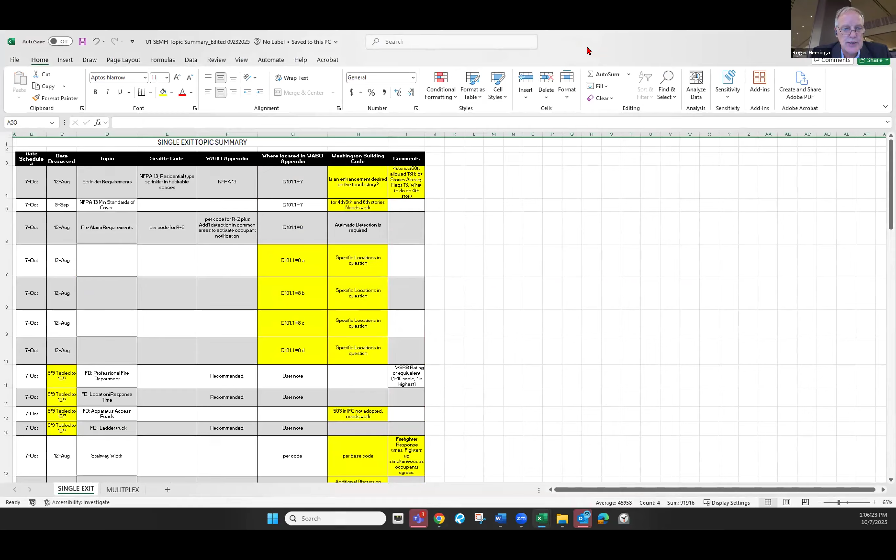Let's see, so this gets us to agenda item number 4, which is single exit work. Yes, and Ardel, if you would like to continue working through the spreadsheet. Just so, Dustin, we have the fire department, right? Those were the big ones we were going to try to hit at this meeting. Yes, sprinkler requirements, and mainly all the fire department and sprinkler stuff for this one. And we wanted to kind of broach the emergency egress and rescue openings as well. Today is what we had planned, and we're not stuck on this plan, but this is what we had planned for today. Thanks.

So Ardel, if you would. Sure, I can, but I think Dustin, can you continue to walk us through, and bring it up, please? I think let's.

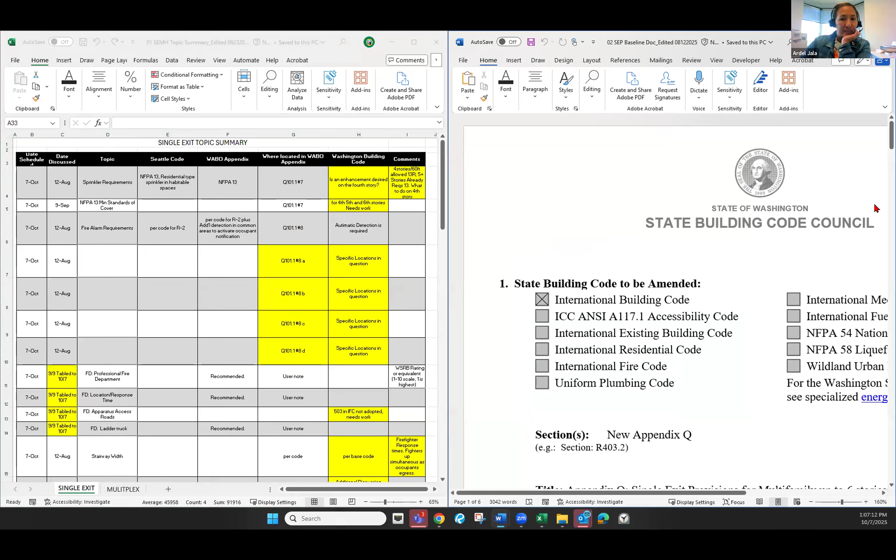Are we looking for the spreadsheet and also what we have here as far as the code baseline document? Do we need anything else for the presentation?

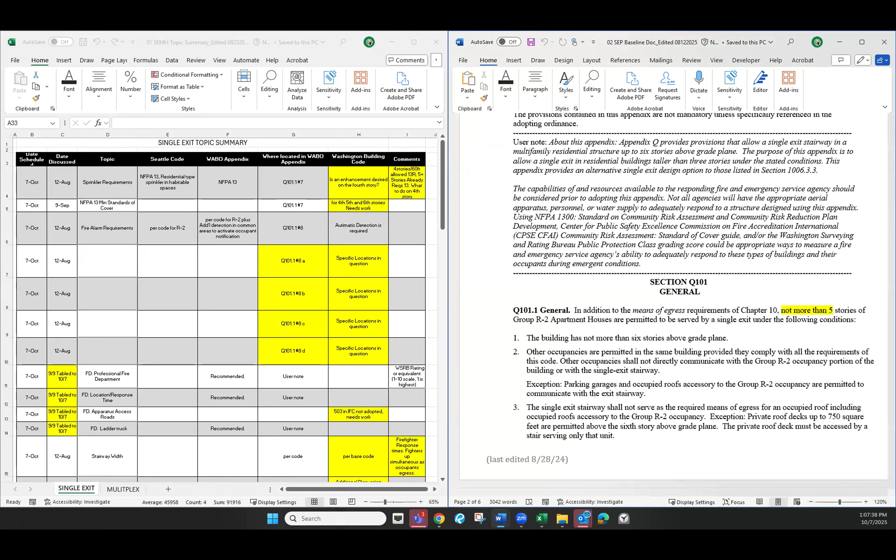I'm not sure if Mike Messer, did you submit any of those language changes to SBCC and Dustin? Yeah, I just sent over a fire alarm recommendation sheet. When you come to professional fire department, the fire group has a pretty good idea of six items we'd want to include, but we need to formalize the language. So we're definitely prepared to talk through the conceptual side of that.

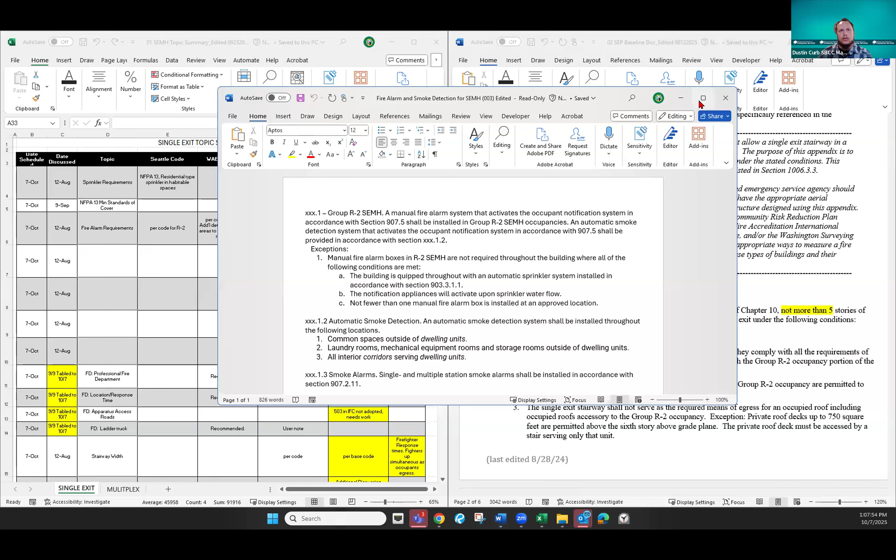So this is the document I just got from Mike right here. Do we want to run over this right now or continue on with our baseline? I think we should go ahead and go through it. This is something that we were waiting on, and I think it touches a lot of outstanding topics. So I think that we should go through it.

Okay, and Mike, are you prepared to be the driver of this? Oh, absolutely.

We've had a lot of conversation over the last numerous meetings about what type of fire alarm system to put in. I want to say two meetings ago for this particular topic, I was really seeing a lot of confusion on the difference between fire alarm system, manual fire alarm system, smoke detection versus smoke alarm. So we really tried to break out our fire alarm requirements the same way the International Fire Code and International Building Codes in Chapter 9 break out the requirements.

I do want to send a quick shout out to Chris Russell, who's on the fire alarm industry side, who gave us a really good thorough review, and some of the blue is part of that review. Needless to say, things work out really well on paper, but you want to make sure they're buildable in the 3D environment. So he was able to double check what we were asking for is doable, and certainly flag anything that sticks out as a design issue on his side.

Moving right into it, we're calling these our Group R2 SEMH housing. So we are asking for a manual fire alarm system. A manual fire alarm system by definition is a system that has a pull station. We're also asking for occupant notification, so that's your horn strobes and low frequency sounders in your sleeping areas and all the other stuff that actually alerts occupants to a fire or another emergency going on in the building. And that's all in compliance with section 907.5, so existing code.

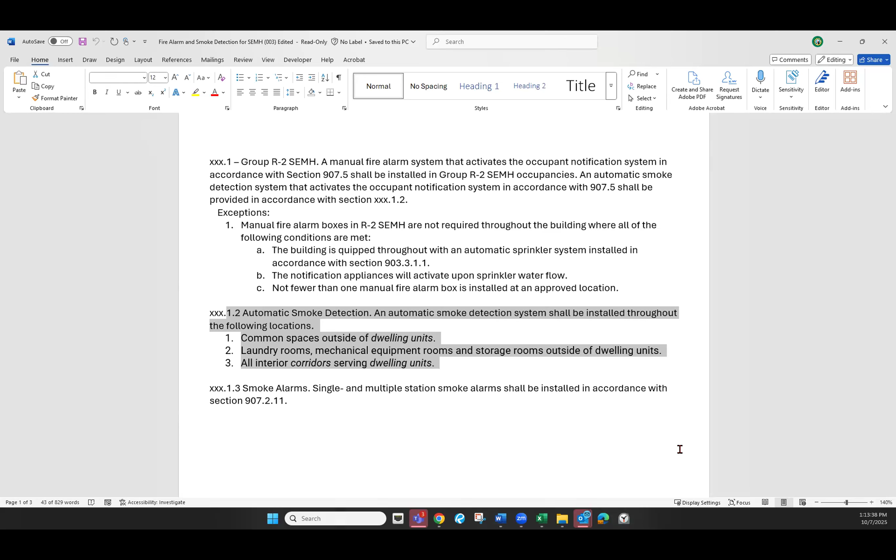Moving into automatic smoke detection. Automatic smoke detection systems shall be installed throughout the following locations, and these locations are subject to change with other areas of the code. If we have common space outside of dwelling units, we want detection in those common spaces. If this group decides we're not building common space in these buildings, it comes off the table and we'll make this match. Number two, same deal for laundry rooms, mechanical equipment rooms, and storage rooms outside of dwelling units - we want smoke detection in. Again, if that changes elsewhere in the code, we'll bring the fire alarm requirements to match. And finally, all interior corridors serving dwelling units. Last line: single and multi-station smoke alarms shall be installed throughout in accordance with 907.2.11, which should already be base code. Those are your dual purpose alarms - they sense smoke and activate the in-unit alarm.

Any questions on those first two areas?

John: Mike, thanks for putting this together. Couple questions. One, just to be clear, if we have exterior stairs or exterior egress balconies, exit balconies, those do not require the automatic smoke detection? Mike: Correct. Exterior would not work, and for the obvious reasons - you have airflow to where smoke would typically not accumulate to set the alarm off. John: Okay, so it would be there, but it would serve no life safety purpose. Mike: Right, sure.

John: And then the other thing is, are these intended to be written as amendments to the fire code, or are these going to be inserted into the appendix? Mike: This would be inserted into the appendix. So what we did is we took it as a fire code and kept the language the same. In fact, we pulled a lot of this out of our R2 dormitories, if it looks familiar, which is one of the things that brings it above what base code requires. But we did want to write it in the same fashion as the Fire and Building Code Chapter 9s appear.

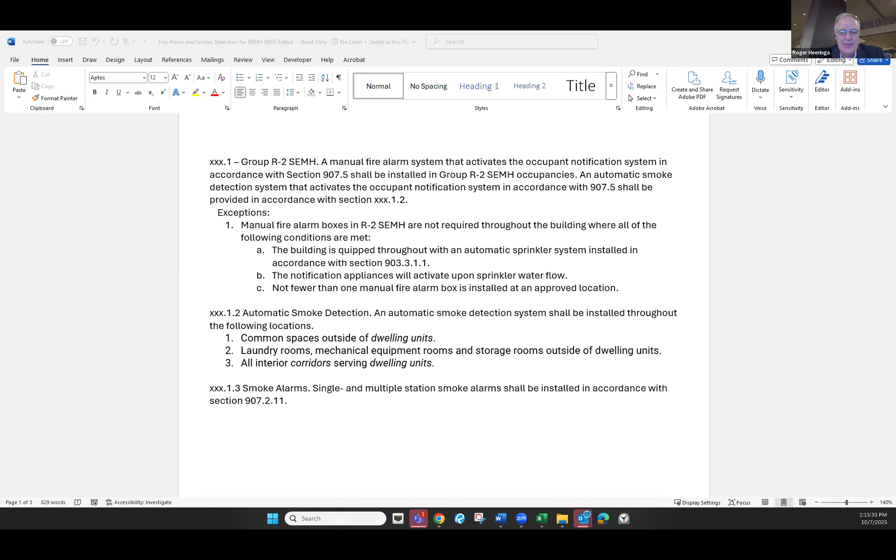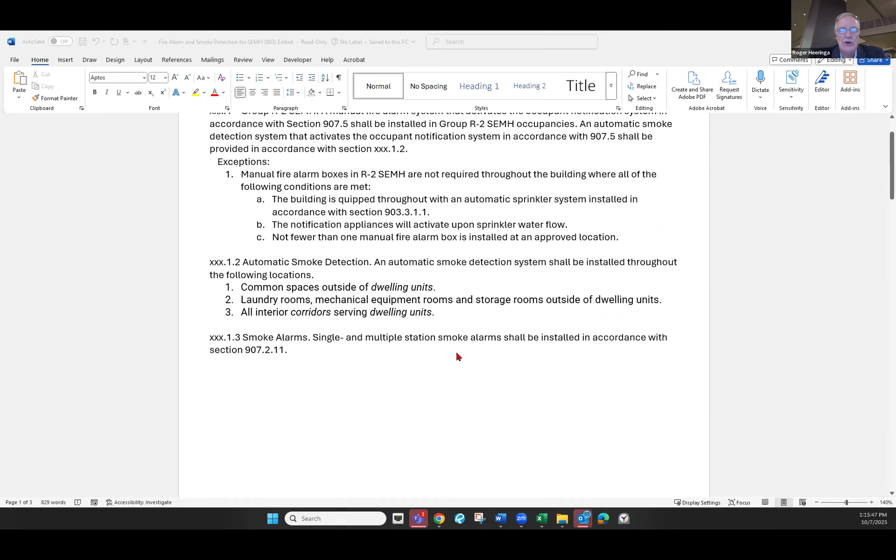Are there other questions? I do have a little bit more after you get through the questions, down on the bottom, one more line. Let's take a few. Okay, there is only one more line - well, two more lines. Okay, well go.

I'm sorry, I shot this a little early before I sent it over to Dustin. A lot of the commenting you're seeing is from Chris Russell, who helped us out significantly. I was trying to go through and remove the comments before sending it to the group, but nevertheless, comments are valuable. Okay, so the black on the second page is the next set of requirements.

Required smoke alarms in dwelling units and R2, S, E, M, H occupancies may be interconnected with the fire alarm system in accordance with NFPA 72. So what we're saying is that your smoke alarms either can or cannot, based on your local jurisdiction, be connected into the building's total fire alarm system. Reaching back to John - I think John and some of the other building folks on here brought up issues with false alarms, and on the fire side we totally get the false alarm concern as well, so we're now giving it back to the jurisdiction on whether or not they want the in-unit alarms to interconnect out. And then there is one more line down at the bottom.

Habitable spaces and dwelling units and R2 SEMH occupancy shall be provided with visible alarm notification. The visible alarm shall be activated by the in-room smoke alarm and the building fire alarm system. You can see my comment highlighted, which is FPE, fire protection engineer, making sure this is possible and something that is done.

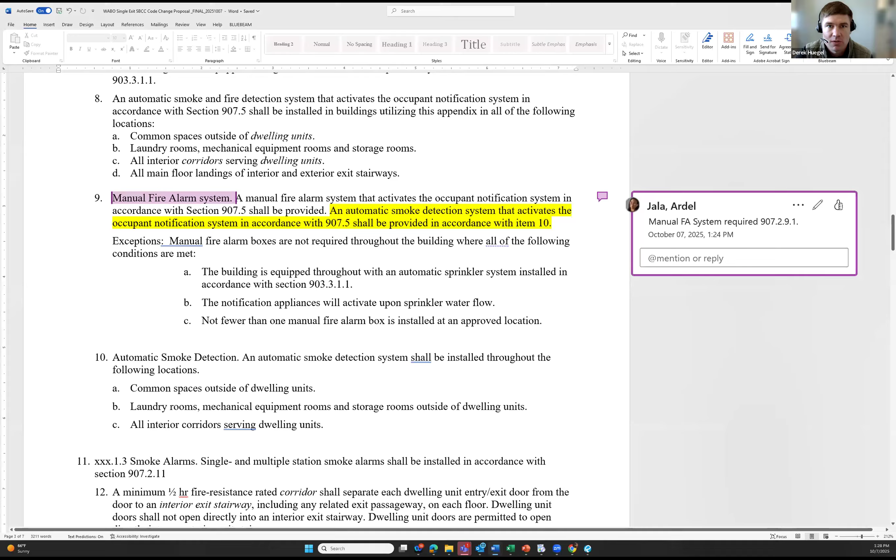And if this is something that needs to move, well, off to a separate meeting, that's fine. Oh, keep going, because it's gonna help me out too, Ardel. Okay, I was going to say, look at Roger scratching his head. He's exactly how I feel right now.

I don't know much about the fire code, being a structural engineer, but I wanted to say two things. I believe, as we have a final product, it's going to be important for this group, as I present it to the full council or to the public, that we have a list of enhancements. Like, okay, we said a single exit, you can go up to 3 stories, now we're going up to 6. Have we added any enhancements that we think are critical in order to make that step?

So as we go through this conversation, the question Ardel had about what is base code and what is not base code is important. I'm going to want to know, are we asking for something in addition, enhancements over the base code?

And the second item is, this is going into the building code. I'm not a code expert either, but I feel like, do we have to be pulling more or less information from the fire code into this appendix? Maybe Ardel, that's a question you've had answered. You continue to, is it mentioned at the beginning, at the top, maybe?

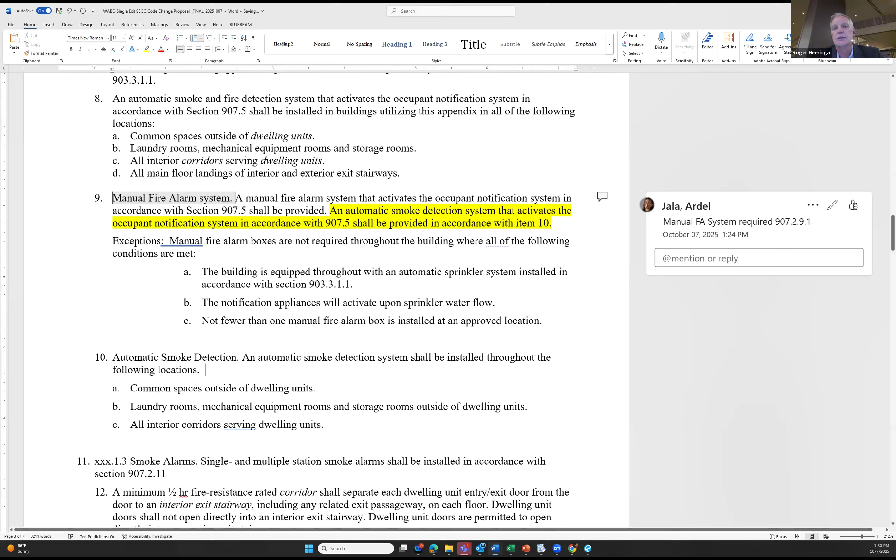But again, let's be clear that it's fire code, not building code. Does that mean we can or can't rely on the base code being more stringent? The base code still applies. This does not supersede the base code unless it specifically states. So what this says at the start is, sorry, that's not the proposal.

Yeah, right there. So if this is where we need to say, in addition to the fire code provisions, I'm just trying to pull Mike's language into this. What would that look like within the appendix to correlate?

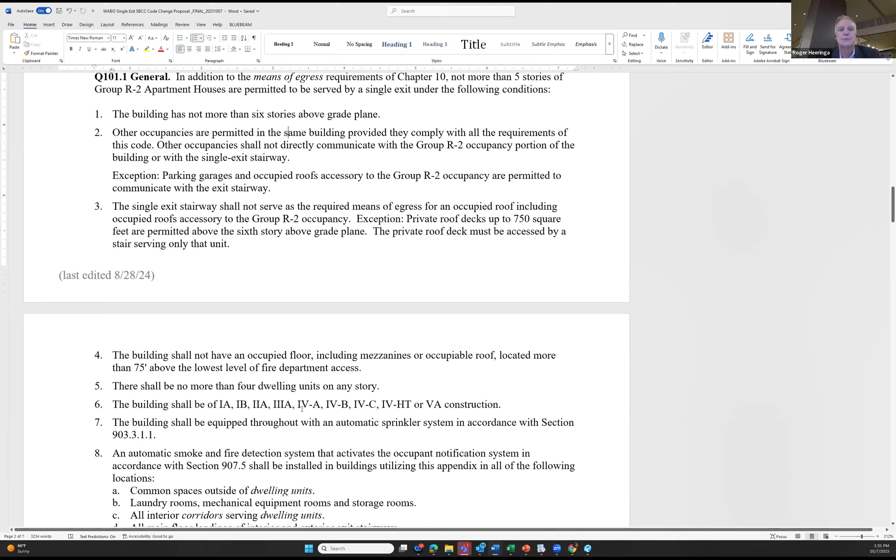And if you took a section and made it, sorry, 9-10-11, one is manual fire alarm system. The next is automatic smoke detection. And then another section on smoke alarms. What is already in the base code?

And so this is the language, excluding what's highlighted in yellow. A manual fire alarm system that activates occupant notification shall be provided.

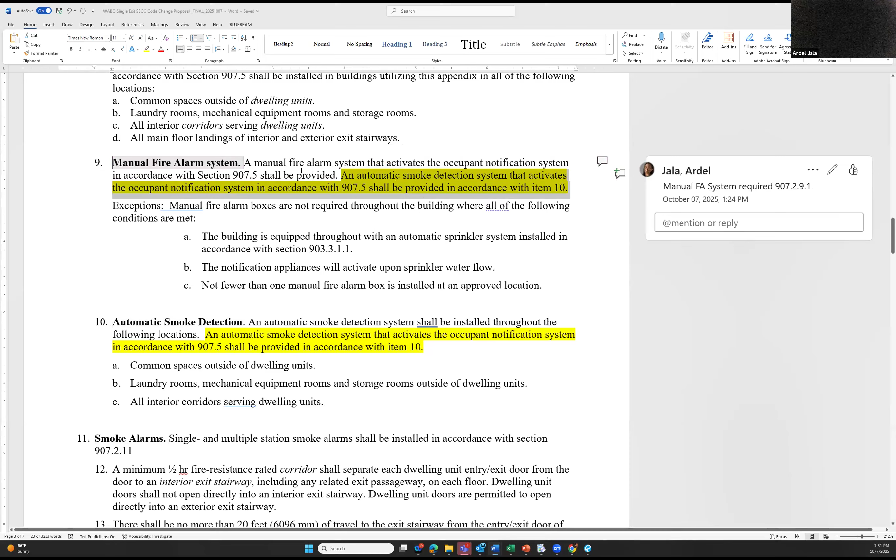And what I'm trying to figure out is, I don't know if you guys could see this. Can you see my code up right now? Yes, okay.

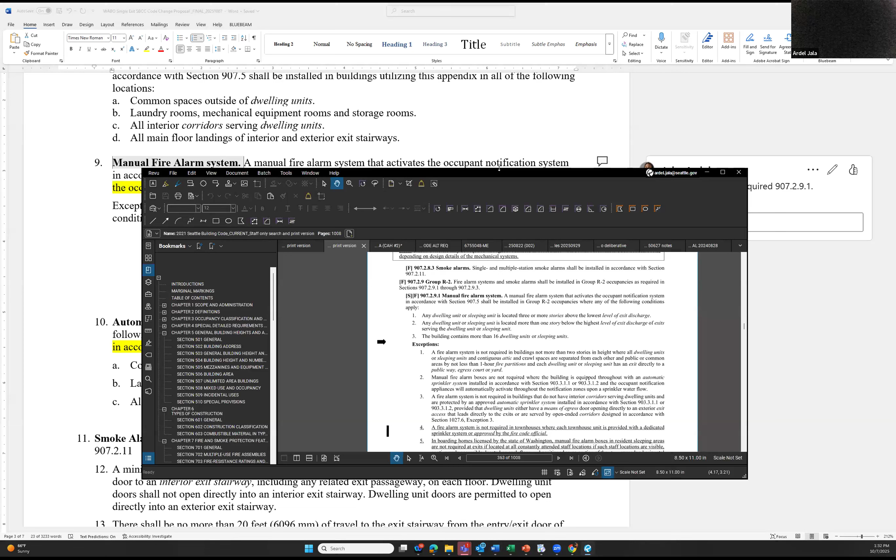907.2.9.1 is manual fire alarm system that activates occupant notification in Group R-2, where any of the following conditions apply. So it's not only where it's more than 16 dwelling units, you can trigger it under any of it. The first one is any dwelling unit located 3 or more stories above the lowest level of exit discharge. Well, this is a single exit, we're already at a 4-story or higher building, so we should already be getting the manual fire alarm system out of the base code.

And item 2 says, as an exception, it's not required where sprinklered throughout with a full NFPA 13 or 13R system, and occupant notification automatically activates through the notification zones upon a sprinkler water flow.

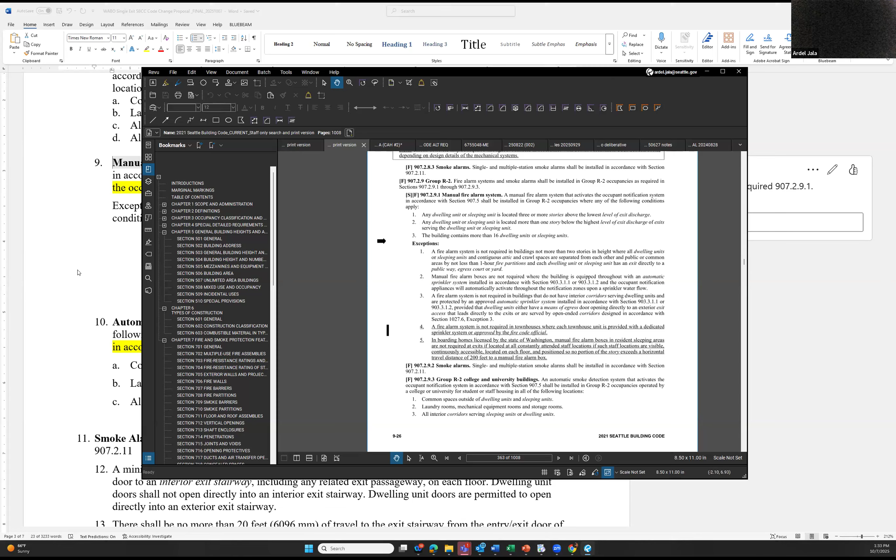So if I look, and I'm sorry, I'm not great at putting things side by side on this size screen, this first sentence is identical to what's in the R chapter language for manual fire alarm system. The exception is the same, and leaves out the 13R exception. This part is the same, but this is a delta, this is an additional criteria to the exception.

No, that comes out at 907.2. It's 907.2, is it in there? Okay, yeah, if you go up to 907.2, you'll see it in the second paragraph, Ardel. Sorry for butting in. No, please do, I'm just trying to track what's in 907.2. Yeah, all the way up here? 907.2, yep, all the way at the top, where required, new buildings and structures, second paragraph, not fewer than one, right there.

Okay. So I think what Mike, you said is that the add is the occupant notification system. Is that correct?

Yeah, that's correct. It's the occupant notification, and thank you for explaining that. I think that's one of the things that's been very confusing, whether it's this or multiplex, is that we're dealing with a very small section of code to where nobody's going to build the occupancy up to a 3-story. And you're right, base code, once we hit that 4-story or larger, it takes over.

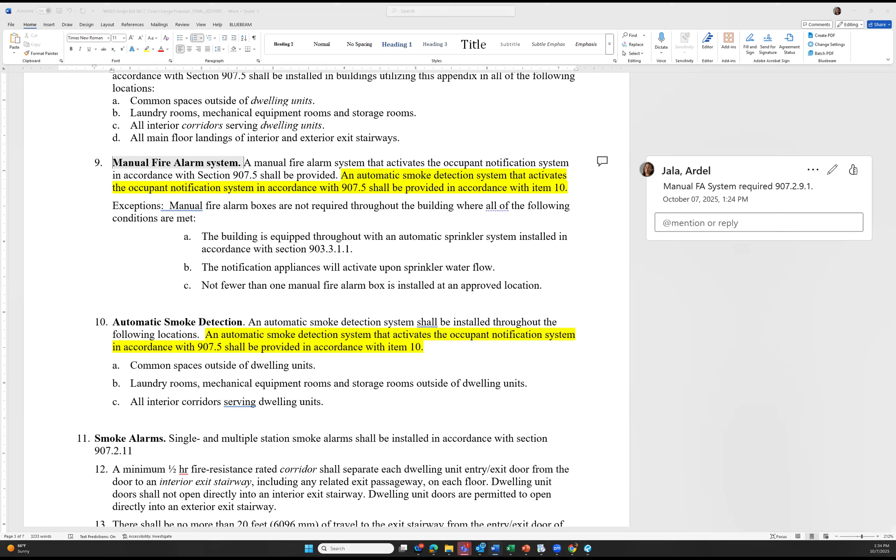So really, to the group, where we proposed any of these, first off, any language that makes life easier for the group or for a code official, the fire group is for. But I also just wanted to bring in some of the reason why we wrote it the way we did is to set the expectation of what the building gets irregardless of how it's built, if that makes any sense.

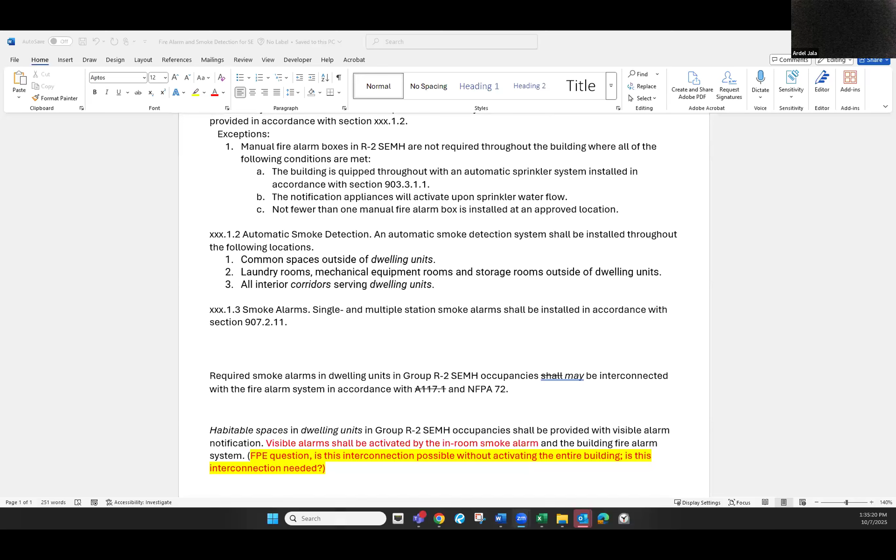And I think that's where the confusion is coming from. Does that kind of capture what you're saying, Ardel, with base code versus the additional ask? Yep, it does. Because you're 100% right. Where it becomes more additional throughout the building process is 1 to 3 stories. So I totally get it. Thank you for bringing that up.

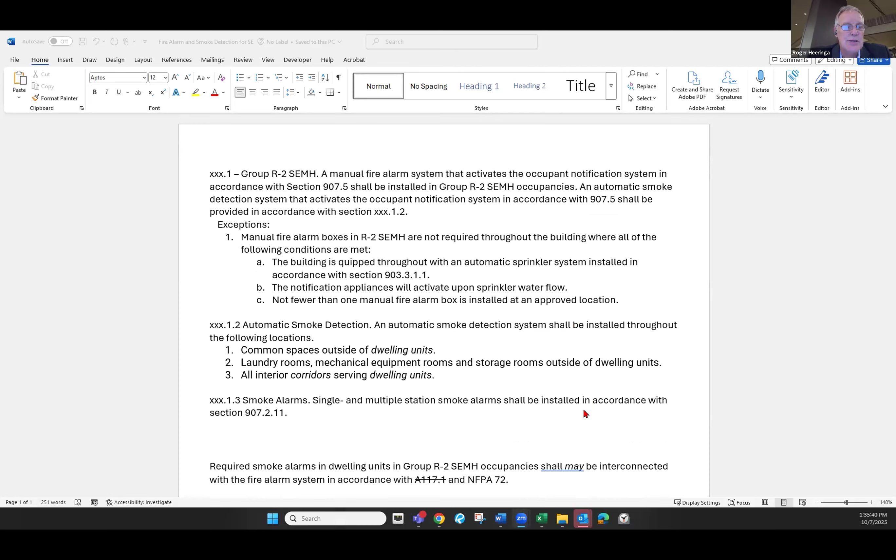Okay. Can I move over to Patrick, who's been waiting patiently?

Thank you. I have a question, Mike. If for the occupant notification system, say somebody's cooking in one unit and they leave something in their oven a little too long, creates some smoke, the smoke alarm goes off. Is that going to trigger an alarm in other units, or is it only if the sprinkler goes off?

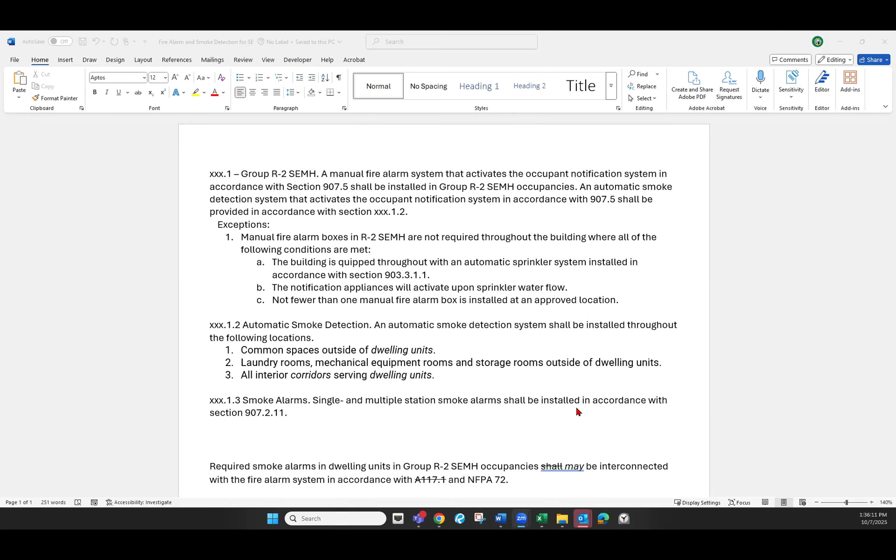Yeah, so if you look at the bottom of the page to where it says required smoke alarms in dwelling units in group R2 may be interconnected, that's actually where we've made the shift from shall be to may be interconnected for your exact deal.

And I want to say John brought it up in the past where we were talking about burnt popcorn. And if you look at our R1, our hotel motel, the classic burnt popcorn on the 6th floor, and you get 3 engines and a ladder. So what we wanted to do was shift that to the jurisdiction by writing it as a may versus a shall.

Awesome. Thank you. I appreciate that. I've had some instances like that in my own building, and I feel like it ends up just kind of making people get immune to the alarm system because you just assume that it's a false alarm. And I think that actually makes fire safety worse than not.

So thank you. Yeah, no, 100%, I comment to that too. I came out of operations on a ladder truck in a high-rise area, and 2 a.m. false alarms drain down your resources to where you're taking one ladder truck that might be serving an entire battalion or even city, and now it's committed to a false alarm because of burnt popcorn.

And then what Patrick mentioned is something we see on the prevention side of learned behaviors. If you go through too many false alarms, then it's kind of like crying wolf. People start to ignore the alarm. So we recognize that, and we want to turn that back over to the jurisdiction, so the fire code official, building official, fire chief, to make that determination for their community.

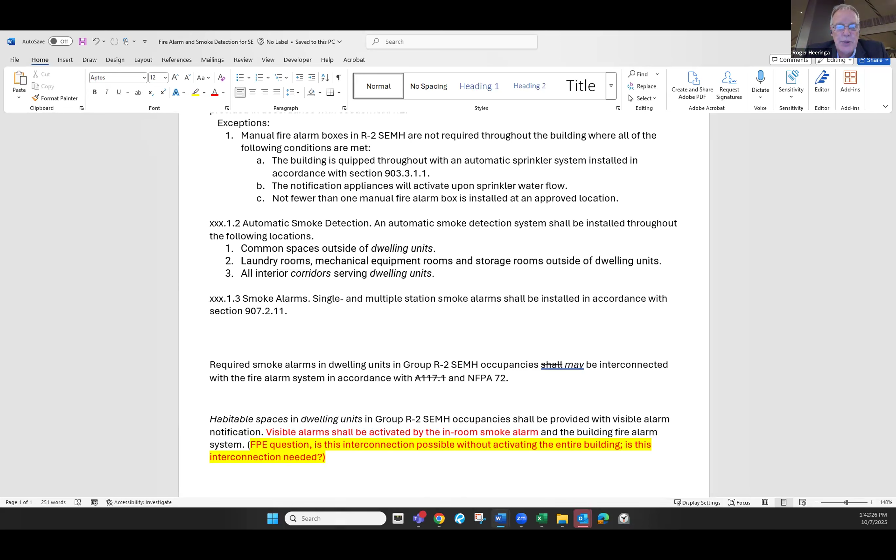I believe that we've come to - Ken's summary was a very good one. What I believe we've got to do is take this information, since not everybody had the chance to look through this. Should we now try to go back to our baseline document and make modifications to it, given the conversations we've just had? Yeah, absolutely, from fire. Okay.

There is a difference there - it's item 8D from the baseline document that appears to have been dropped in this version. And then the other difference, you guys can tell me if it's the same or not, but item 8 was previously written as an automatic smoke and fire detection system, and item 1.2 is now written as an automatic smoke detection system. What we did is realign that original language to what is actually written in the code - you'll never find in the IBC or IFC an automatic smoke and fire detection system, so we wanted to make sure those aligned.

I was going to say, for all the code folks on here, one of my favorite convoluted sayings is that the code is what it is not. And what I certainly didn't want, at least for fire, is to get into rewriting or redefining code.

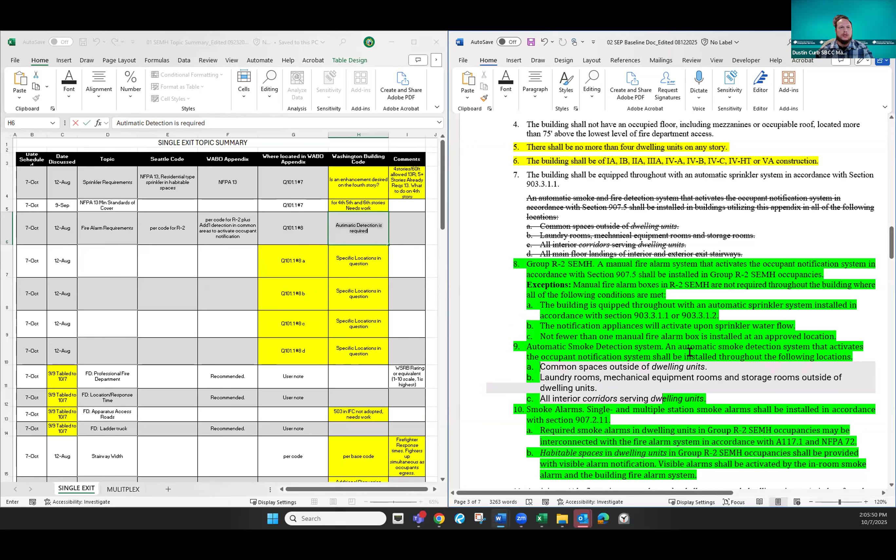So do we want to go up to line item number 4 or 5? Are we to the point where we need to start making yay or nay decisions? I think we're getting to that point, yes. In some of these locations we're no longer working with the WABO appendix in its current format. It's very close, but there are some new numbers in here, so I'll need to update these sections before our next meeting.

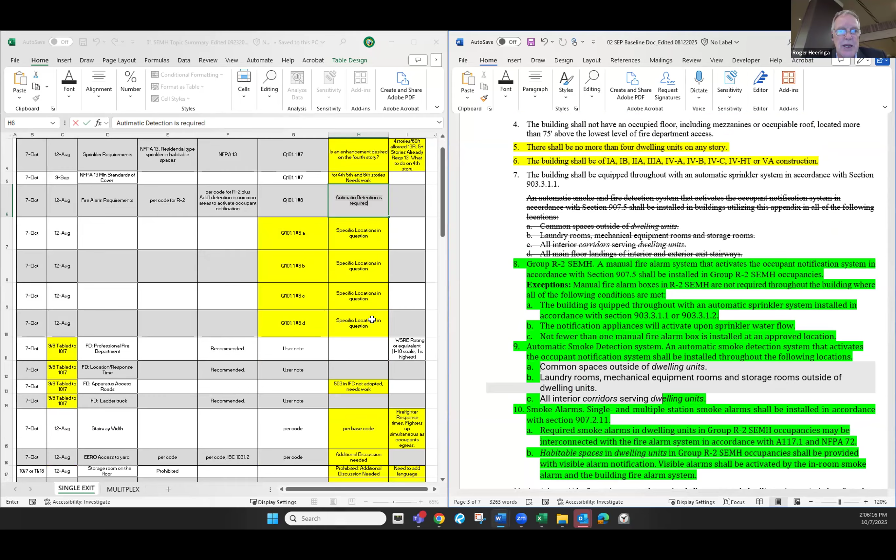So did we just agree on lines 6, 7, 8, 9, 10 on the summary sheet? I think we had those because we pulled out item A, item B, item C, item D. The lines here are no longer relevant to what we have in our baseline document, so we've got new lines replacing them. Those should be resolved.

So I would suggest we also have Mike or the fire folks talk about rows 11, 12, 13, 14 - professional fire department, which, remember, that language is in the legislation. It's not defined in the legislation, but it's there. We had WSRB, but then we realized WSRB specifically states they can't be used for code language - that was at our last meeting, I think. So have we had time to address the professional fire department?

We have 6 items that we've talked about in the fire subcommittee. We do not have language prepared, but we do have the items we can present, and we'd love to hear some group feedback on them. Why don't we do that? Do you have it, can you share it? Yeah, you can send it to me, in an email, nothing formal. Email works, we don't need to be formal. If you want to forward it off to me, I can pop it up, or I can stop sharing and you can share. No, coming to you, Dustin.

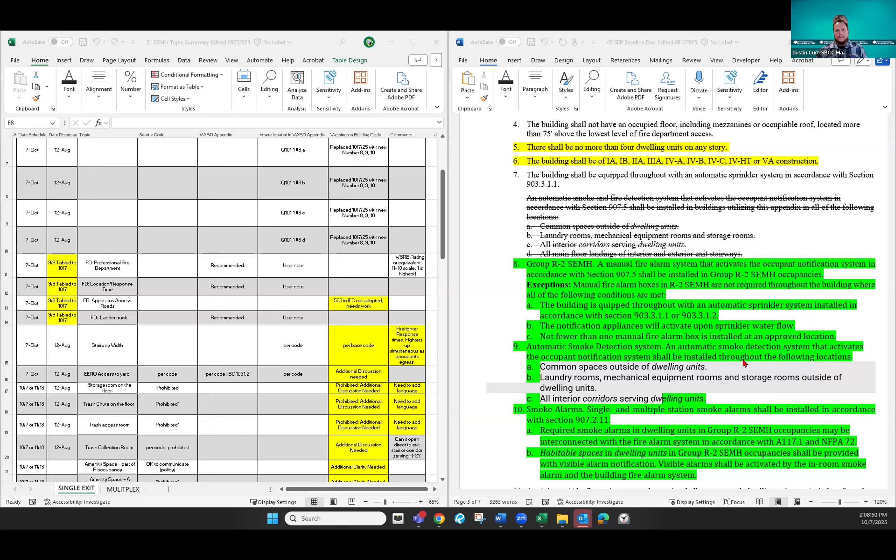And then Dustin, when it pops in, you'll see professional fire department, see below and just 6 bullet pointed items. I'm still waiting on it, but I'm going to drop it into a blank document. There we go.

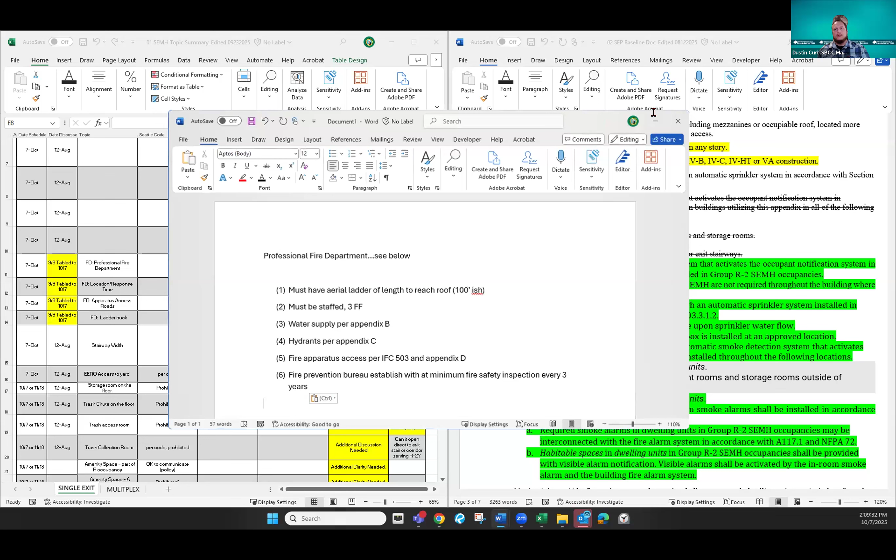All right, cool deal. So moving through, I'll give a little background on professional fire department, where our minds are, and then open discussion to see what the group thinks and which way we go. As we move through, I'll talk about standard of cover, how we respond, the tactics to respond to these buildings, our impression of the response strategy, both for the occupants and the fire department, and the different requirements we'd like to pull in.

Starting off on professional fire department as a whole, we understand that in this case - please feel free to pop in if I'm under a different impression - but moving to a single exit, we kind of changed the response strategy for the occupants, from an evacuation response strategy to more of a shelter in place, knowing that the single exit could potentially become blocked or inoperable.

With it being a shelter in place and single exit, you shift the tactical responsibility now to the fire department to provide an aerial device or aerial ladder. Aerial ladders come in all shapes and sizes.

So when we look at that, we also look at the type of ladder. That brings us to the first part: the jurisdiction where the single exits would be built has to have an aerial ladder truck of some sort. For the length of ladder, I'm working on some calculations right now as to what it would have to be to meet that requirement.

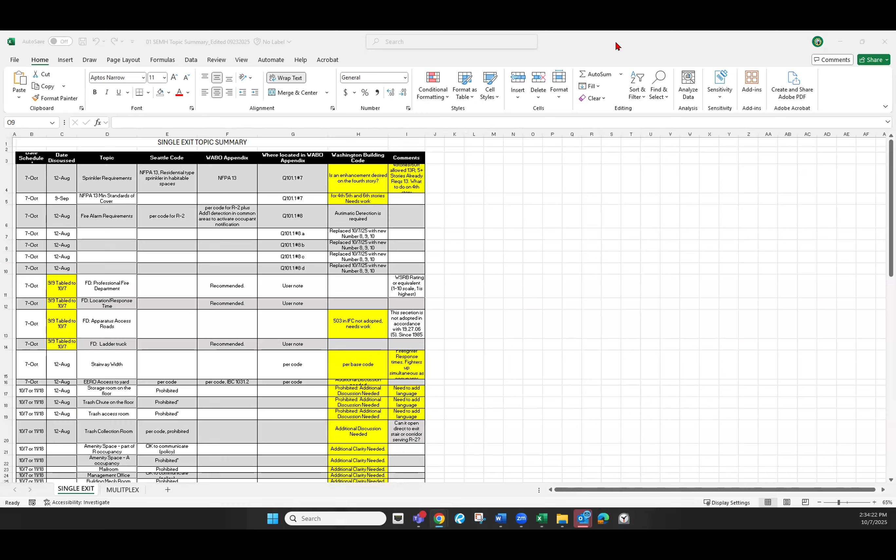And if this is a rural area of Washington, I've got some - I'm a county fire marshal, and I've got some in my county that are very rural. You're not going to build this kind of thing there. This is going to get built in the areas where you have the densities to require it. You probably wouldn't be allowed to build this in a rural residential, or maybe some of the other zones like this. It's going to be in an urban high density type of area, maybe the urban low, but most likely the urban high.

So you're going to have road standards. Most of the time they're going to be served by public roads with requirements that are beyond what this is. But in those instances, which we're seeing a lot of these coming in now, people are electing to say, no, I'm not going to build to a road standard, I'm going to call this a private road, or once you leave that public road, you're now on a private access way. And that's particularly where the fire code comes into play, and particularly where we need to include these kinds of things.

So, yes, they may not be strictly building construction that's on there. If we want to have some reference documents to take you back to the other way, they are a new animal, and the whole thing is just really wonky about a professional fire department. And I know that we'll all get beat up about it when we go on, because if you want to go tell any volunteer fire department in the state that they're not professionals, you better be able to run fast. But, there you go. Thank you.

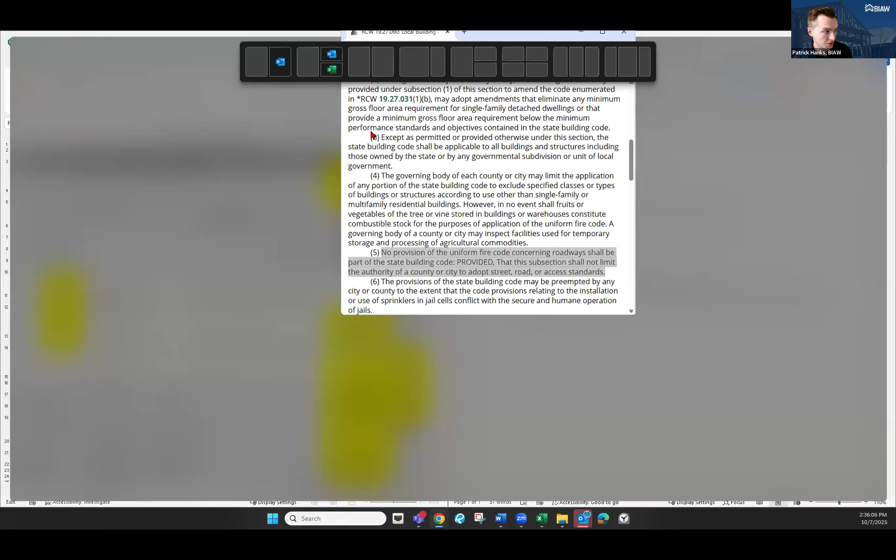Yeah, I just wanted to read again the requirement in 19.27 for this technical advisory group in 115. It just says the recommendations must include considerations for adequate and available water supply, the presence and response time of professional fire department, and any other provisions necessary to ensure public health, safety, and general welfare. So it doesn't say that you have to prohibit these types of buildings if there's not a professional fire department.

or so forth. I think the recommendations that Mike brought up today are scaled back a bit from ones before, and I think there's good positive room there. I'd like, since it's not defined code language yet, if we looked for areas where

we focused more on scaling the limitations based off the ability of the response of the fire department, instead of saying you have to have a 100-foot ladder. I think they were kind of talking about this before, but like, okay, if you have a 75-foot ladder, then you can build up to this many stories. If you have this size of ladder, then you can go to this many stories.

I feel like that will allow smaller jurisdictions to still use the bulk of this appendix based off their ability, without completely precluding them from using all of it if they just don't meet one of those categories. And I appreciate what Dustin brought up. Want to make sure that, I understand this is kind of a new area, we're trying to figure it out, but making sure whatever recommendations we come up with apply with other laws and requirements and make sure it fits within the code. So thank you.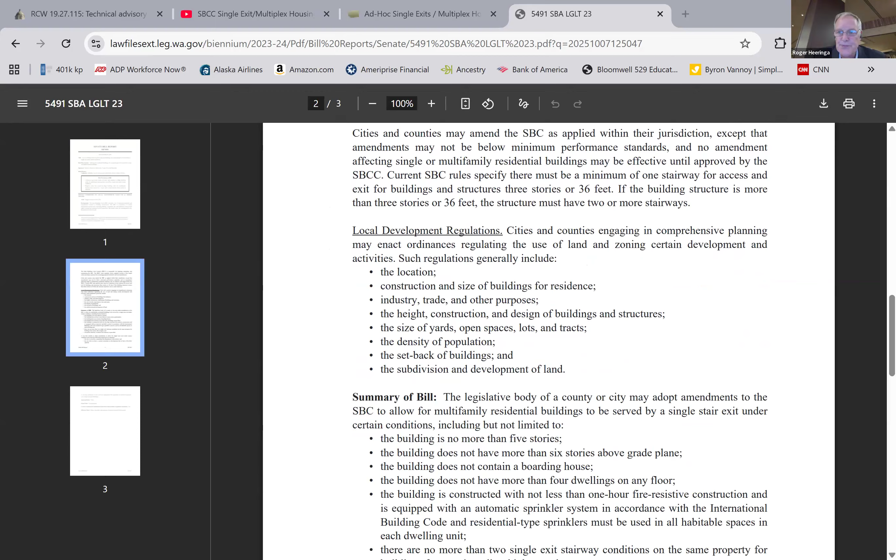Are you still seeing the summary of the bill? Still seeing it. Yep. Okay, good.

So it was interesting. The legislative body, or county or city, may adopt amendments to the SBC to allow for multifamily residential buildings to be served by a single stair exit under certain conditions, including but not limited to: the building has no more than 5 stories, and the building does not have more than 6 stories above grade.

I think that plays to the conversation we had about the 5 stories being served by the single exit, but the ground floor can have another exiting option.

The building does not contain a boarding house, which plays into the conversation Shweta brought up about including all R2s except boarding houses. So that's a topic for discussion later.

The building does not have more than 4 dwellings on any floor. So my whole point about allowing for 5 or 6 units on a 4-story building maybe doesn't match that.

The 1 hour with sprinklers—I'll just read it. The building is constructed with not less than 1 hour fire resistant construction and is equipped with an automatic sprinkler system in accordance with the IBC. Residential type sprinklers must be used in all habitable spaces in each dwelling unit.

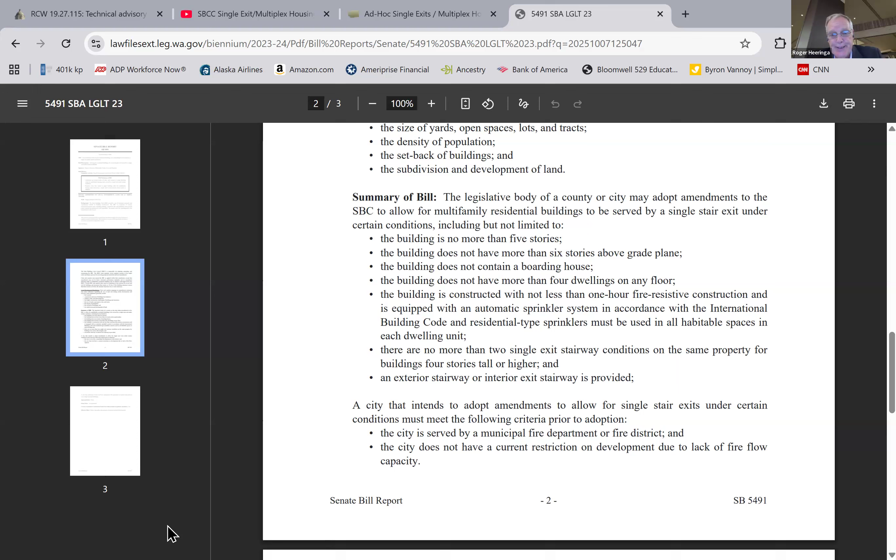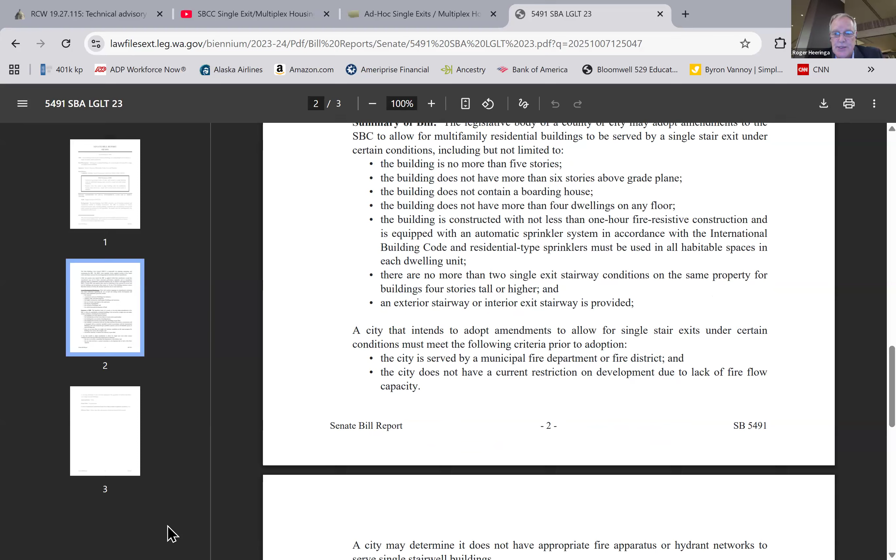There are no more than 2 single exit stairway conditions on the same property for buildings 4 stories tall or higher. So we've been talking about whether we can allow 2 of these—that was a discussion in the initial bill. An exterior stairway or interior exit stairway is provided.

And then it talks about a city that intends to adopt amendments to allow for single stair exits under certain conditions must meet the following criteria: the city is served by a municipal fire department or fire district, and the city does not have a current restriction on development due to lack of fire flow capacity.

The city may determine it does not have appropriate fire apparatus or hydrant networks to serve single stairwell buildings. So again...

We don't take that language as something we need to adhere to, because the RCW that was actually passed went through a whole lot of discussion in the legislature, and what came out was the actual bill. But if we start thinking about what the intent was of the sponsors of the bill, I think it can inform a little bit of our conversation.

So with that, I don't remember if somebody else had their hand up. What I'm kind of thinking we need to do—well, I'm not sure. I don't want to force my opinions on moving forward, other than noting we've had some conversation.

I think we need to get it into some code language, into the document, into the appendices. And somebody correct me if I'm wrong—we need to establish that if you are building according to Appendix Q or whatever it is, the municipality has to have these criteria. Maybe this is the first item, I don't know.

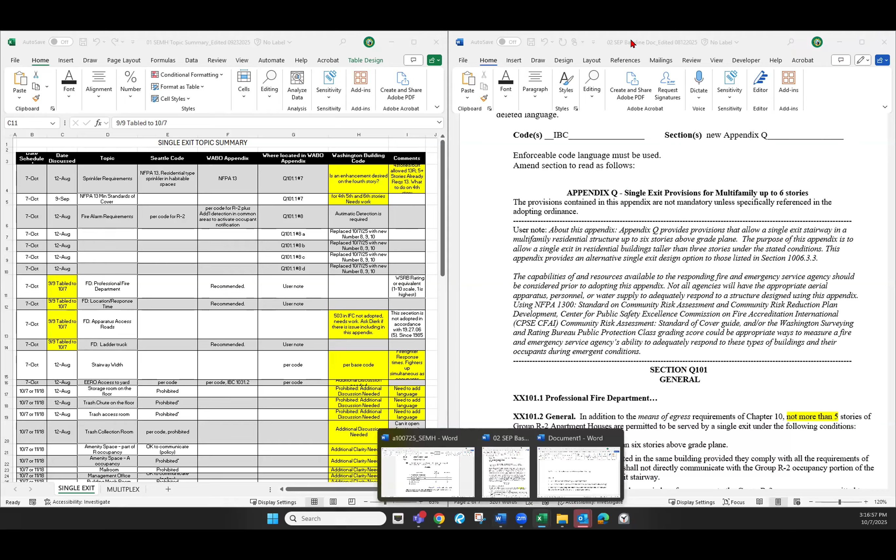Where I think, Derek, the options we have are: if you're going to build according to Appendix Q, you have to use 13 - that's one option, and that directs people, if it's for levels 4, 5, and 6, you have to use 13. Option B, and this is the one I keep going back and forth on - I'm not sure I support option B - but if you're building 5 and 6 story, you have to use 13. And if you're building a 4-story, you can use 13R.

Ardell, help us out, you've got a lot of experience. Yes, please do - I'm confused, Roger, with the first proposal. Did you just suggest that you're allowing 13R for 5 and 6? No, I misspoke, sorry. Okay, thank you. I was corrected - it's 13 on the top one, Dustin. Thank you.

So I think those are the two options, and I'm...

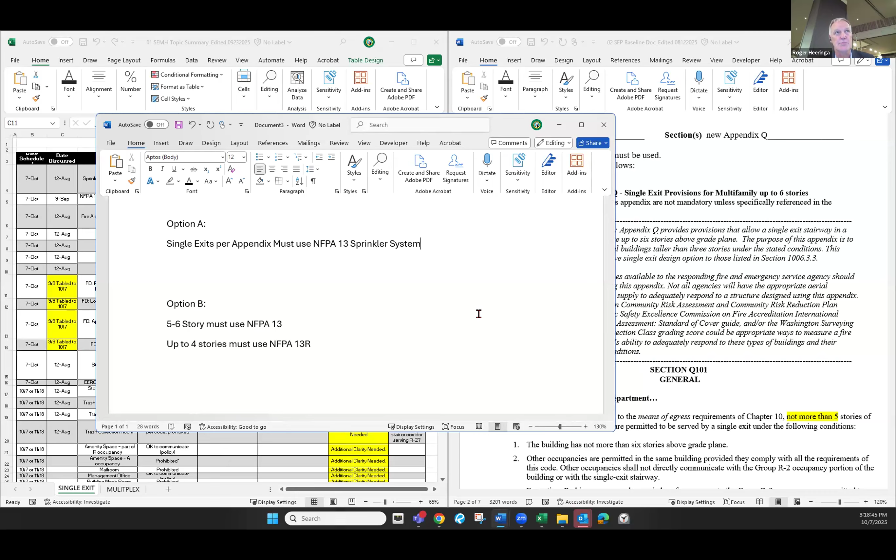Spencer, go ahead, just a quick question. I'm wondering, can somebody remind me, are there sprinkler requirements currently on a single stair that is 3 stories? Yes, it would be allowed to use a 13R. Okay, 13R would be required in that case. Got it, and that's why I've only addressed 4, 5, and 6, because I'm assuming if you're going to build a single exit at 3 stories, it's already covered by code. Yeah, and I'll make it even easier, especially since Spencer brought it up - in the Fire and Building Codes, Chapter 9, residential occupancy type is required to be sprinklered.

Here's another random thought - what if the first 4 floors are 13R and then you put increased heads on the upper stories? That's option B. Oh, you're combining systems in the same building? No, but if you go above 4 stories, you're kicked into the NFPA 13 system. Yeah, that's for the whole building. We don't have a standard for mixed systems - it's either one or the other. I think that was brought up in our previous conversation, and from a cost perspective, you're going to do one or the other.

Rich, go ahead. In my local jurisdiction, we don't allow 13R systems, so where 13R systems are required, we do full 13s. So I think when we do this, we may want to give the local jurisdiction - because this is going to be in the IBC, not the IRC - the option to require that higher level of standard.

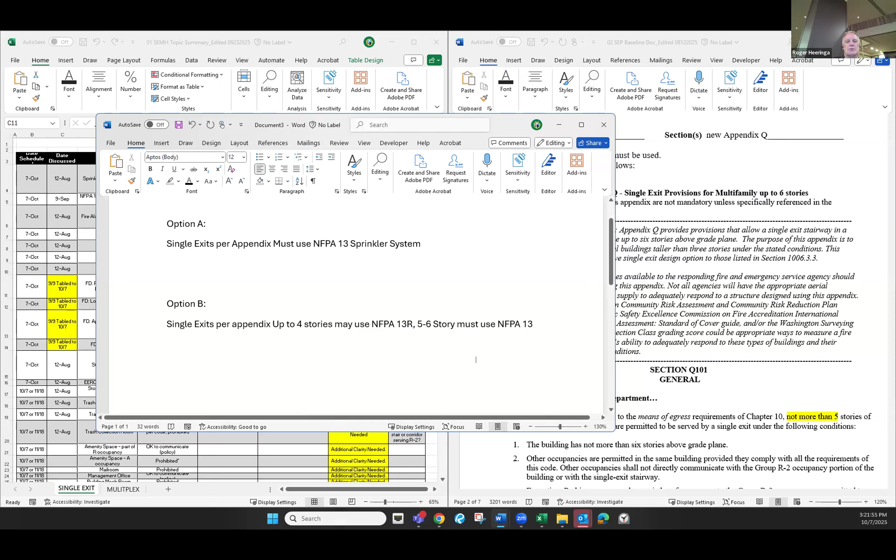Does that address that comment? I think so. That jurisdiction that doesn't allow 13R, would they in a 4-story just do a 13D, or do they go straight to 13? Straight to 13, yeah, because 13D is just 1 and 2 family residential. Right. And what you said is correct, except it's not 13D. The 5 and 6 story must use NFPA 13 if you're building a 5 or 6 story building.

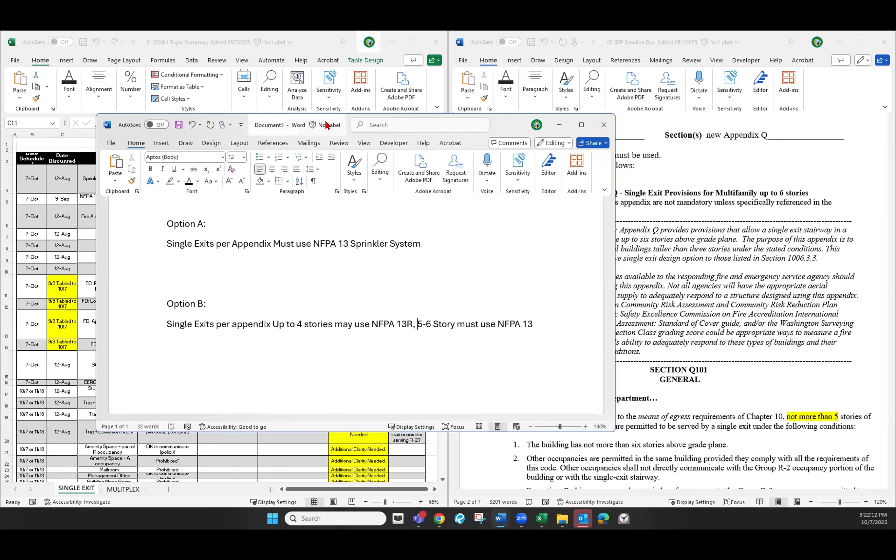Ardell, go ahead. The way this is written into the code change proposal is that there's a line item that states the building must be sprinkled per NFPA 13, full 13. Dustin, if you can scroll down on the right-hand side, please. So I think, thank you. That's item 7.

So because the base code still applies, I think conceptually that should be voted on whether it's option A or B. As far as the language and how you address it in the code change, the option is to do as was suggested, as stated in option B, or if you struck item 7 altogether, then it would default back to the base code language, which is just chapter 9. It says if I've got a 4-story building, I can use 13R. If I've got a 5 or 6-story building, then I'm already in a full 13 for the R occupancy.

So does that make sense, Ardell? How does the base code deal with a municipality that doesn't allow 13R? Then that municipality would have it as their own local amendment. And again, there's no additional thing coming out of the single exit provisions. If a local jurisdiction only will accept a full 13, then if you have item 7 as written, there's no conflict.

Right, they're always going to get a full 13. If you want to allow 13R for the jurisdictions that accept it, then all you need to do for a code change in this WABO proposal is strike item 7. Okay, and then it goes back to whatever the local requires.

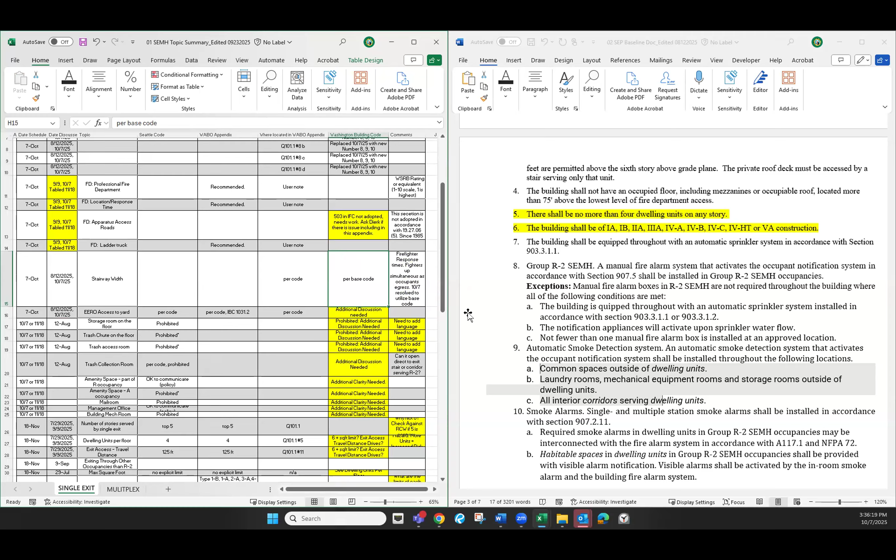So going back to the WABO proposal, that would be item, sorry, item 17, and well, the new number was item 19. In the WABO discussion, it was the same one you're going to have here in a few minutes, which is the model code imagines or is based on that ladder, the single exit with the lack of redundancy.

As discussed at WABO, we decided to extend it to all sleeping rooms on all floors. So this would be up to 4, 5, and 6, where in the model code we would only have to provide it up to the 3rd floor. This makes sense to me and doesn't cost much, and we've got fire trucks with a tall enough ladder.

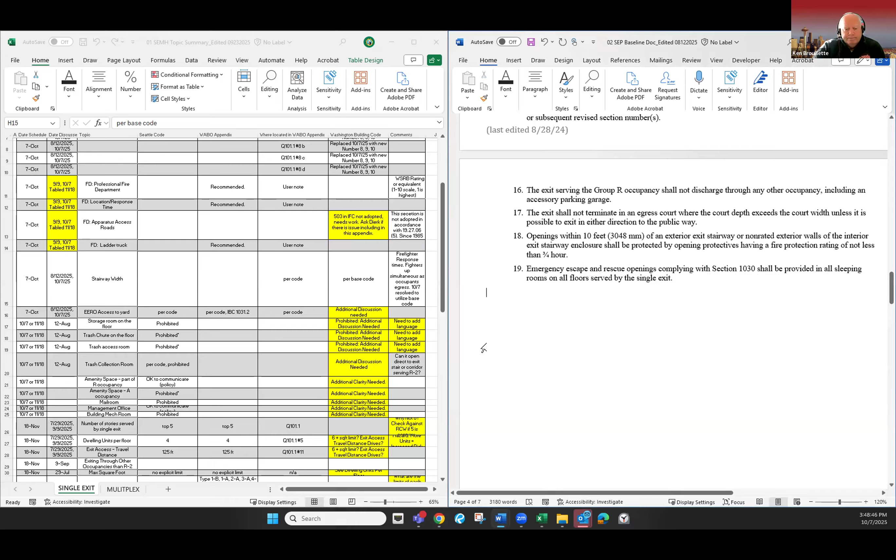Thanks, okay, good point. Anybody else?

If they're on the 4th or 5th floor, they're gonna have to buy a couple of those ladders to join together. Oh, they make them long enough—I have one for a 4-story building.

Remind me, right now in the proposal you have to have them everywhere, right? Yes, all sleeping rooms. Yes. Okay, I'm good with that. I'll make a motion if we need to vote on it, or if anyone has objections, otherwise leave it as is. Yeah, I think we don't have to vote on it if we're leaving it as is. Got it.

John, go ahead. Yeah, if we're done, it sounds like we're sort of done with that item, but I think the notation I'm looking at in the issue sheet talks about access to the yard, and I'm not sure if that's a related point, but not exactly the same.

Okay, so now that we have the EEROs, presumably they have to have access to a yard or something. And then the question is, do you have to be able to get out of that yard to the street? I think that's maybe what this was about, but I don't know.